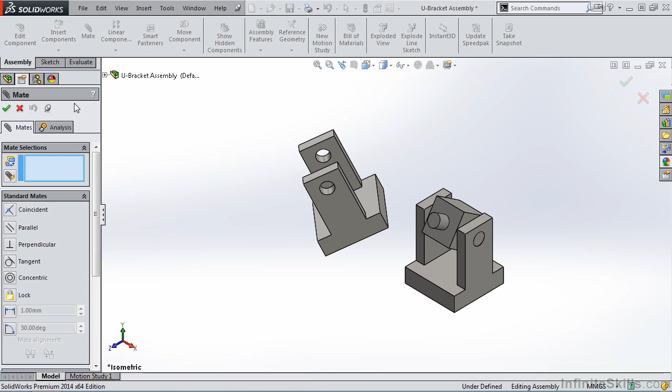I am going to begin by applying a coincident mate between the face of this pin and the face of the upper U-bracket. I'll accept it, and then I'll apply a concentric mate between the hole and the pin.

I'll rotate the U-bracket, and let's zoom up on it so we can see what we have going on here. And notice I can rotate the square block in this direction, along with the upper U-bracket in this direction. Let's try out the perpendicular mate.

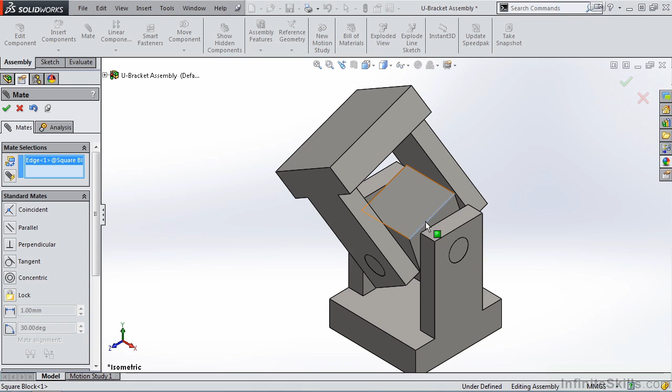We'll begin by locking down the square block to the lower U-bracket. So I can either select a face or an edge. I'll select this edge, and then I'll select a face perpendicular to the edge of the square block. Notice it defaults to coincident.

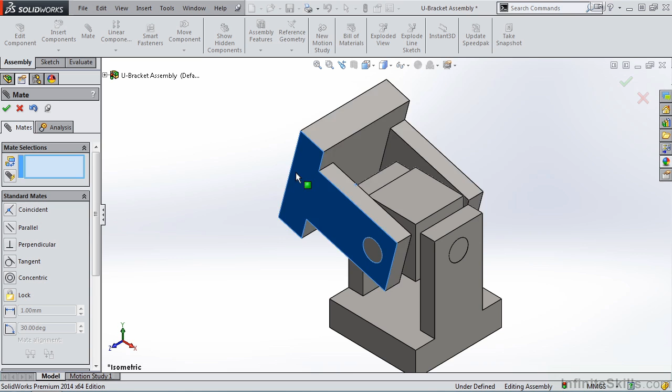I could set it to parallel. However, we are looking at perpendicular. I'll accept it. And now you see the square block no longer moves because it's fully defined. Now let's fully define the upper U-bracket. And let's try to put it in this orientation here, perpendicular to the lower U-bracket.

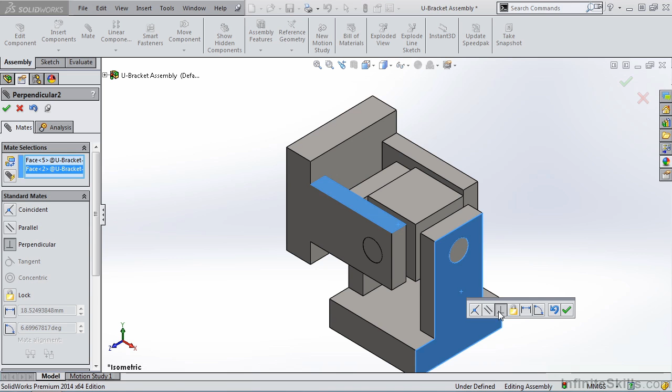We'll do that by selecting a face on the upper U-bracket and a surface on the lower U-bracket, which is perpendicular to the first face. So I'm going to select this outer face here, switch it to perpendicular, and then close out of the property manager for mates.

Notice this upper U-bracket is fully defined, and if you look at the feature manager design tree, you will see we no longer have the negative sign in front of the square block or the upper U-bracket. So when it comes to the perpendicular mate, it's a fairly easy mate to apply, just like the parallel mate.